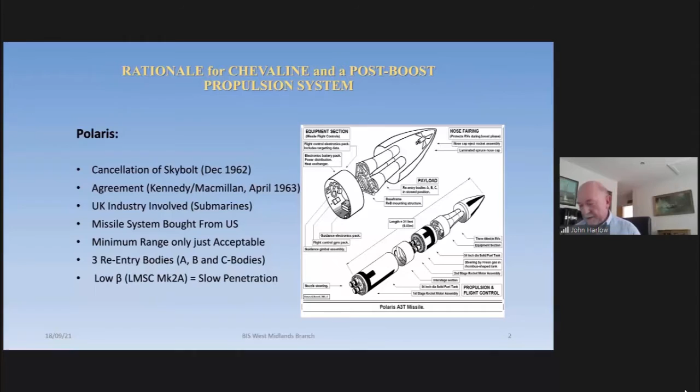Okay, so that's the point there. Terminal velocity is quite low. An easy thing you could do was to have high beta bodies replace the low ones and come in much faster, giving the defence less time to react. A couple of other points: the ABM treaty that I mentioned, the lawmakers really screwed up there. Just to remind everybody, 100 launchers doesn't necessarily mean 100 missiles, but the dear old lawmakers didn't realise that. And studies that we did showed that those launchers could be reloadable. So it wasn't 100 missiles, it could have been 200 or 300 or whatever, protecting Moscow.

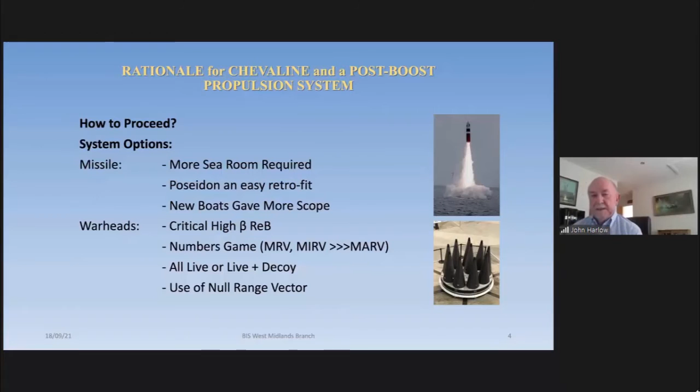The other interesting thing was that SA-12 type, SA-12 plus type systems could be fitted with a nuclear warhead, and the effects of high altitude detonation were unknown against an REB. And when we did get access to that data, it didn't bode well for the survivability of the REBs. Okay, so what were the options? We needed more sea room for the boats, submarines, sorry, nobody calls them boats on Civvy Street, I suppose. We could have had Poseidon missiles backfitted into the Polaris boats, but the whole life was running down anyway on those boats. So obviously, if we had newer boats, we had more scope downstream.

Clearly, high beta, we just mentioned that one. The numbers game of the warheads: it's clear that if we had more warheads to throw at the nasty enemy, he would have to up his game in terms of the defence. There's other things we could do, multiple re-entry vehicles, independent re-entry vehicles, blah, blah, blah, aeroballistic re-entry, etc. But the UK wanted to keep the numbers down for cost. So politically, I guess, economically, we were stuck to low numbers of live warheads.

So the question was, well, if you have a lot of warheads, you either go all live or you have live plus decoy to soak up the defence, and you can use so-called null range vector. Now, the thing about NRV is that it's effectively a volume in space. You can think of it as an arced or curved tube. It all collapses onto the target. So if you fill that tube up with decoys or live warheads, then the enemy sees all this stuff coming in and doesn't know which one's which.

But just to remind everybody, the bottom line, I suppose, is that the missile's job was to lob the C-body at the target and then release the pack. And it was the pack's job to fill up that area of the null range vector with whatever it had on board, all the disguises, and of course the other B-body. And it was the pack's job to move up and down the null range vector, filling that space with whatever the pack wanted to deliver into that space. So we needed propulsion. Next one, please, Bob.

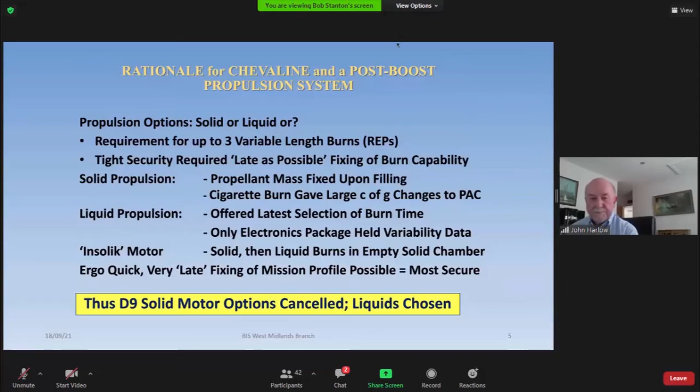Okay. Well, I'm Paul Jackman, an old lag from Westcott. I still live 3 or 4 miles from the site, which is my home village. So I still visit the site quite often, and I'm very interested in some of the sessions you've got, especially with James McFarlane and the Nammo people, having worked closely with them, and in fact starting my career on J-Site, where James now works.

I'm going to do this from memory. I'm not a great collector of history, but I have got a memory, and I'll get my excuses in first. Some of the stuff I'm going to talk about was 50 years ago, so I might make some errors due to a poor memory, and if anyone has anything to correct my memory afterwards, I'll be glad to hear that. That would be great. Next slide, please.

I don't think these slides have been pre-distributed, have they, Bob? So I'll just run quickly through here.

There'll be a brief introduction about myself. Then I'll talk about how these liquid bipropellants came to be at Westcott in the first place, describe them in some detail, then go on to how the technology of that was developed, and leading on to a test vehicle program called PLTV, Packageable Liquid Technology Vehicle, which was very successful and demonstrated a whole range of technologies which eventually got incorporated into the T11.

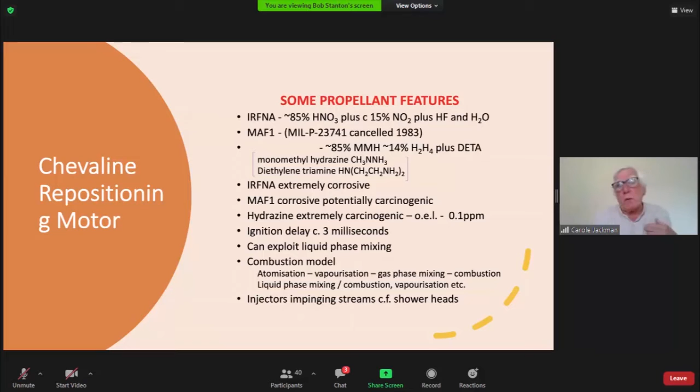Right, so what we set about was, and John wanted me to try and put some names in here, developing these technologies in various sectors and sections. We had actually adopted, though we didn't know it as such, a matrix management approach, something which in my later career as leader of various major programs I was very keen on. So each person had his own line management, but he was also responsible to the group leaders through these activities. So, for example, in propellant handling and safety, it was Dr. Bernard Bonner, a very fine chemist, who still lives in the next village to me.

Expulsion tank design was a guy called Dr. George Cook, an Australian, who I last met at Bernard Bonner's 50th wedding anniversary. We all live close here. Valve technology, Mr. Frank Henderson. Frank developed a lot of the T11. He was responsible for quite a lot of the subsystems. I led the injector thrust chamber design. Solid propellant and isopropyl nitrate gas generator was Dr. Alf Hardacre, and John Rolfe led the solid propellant development for those gas generators.

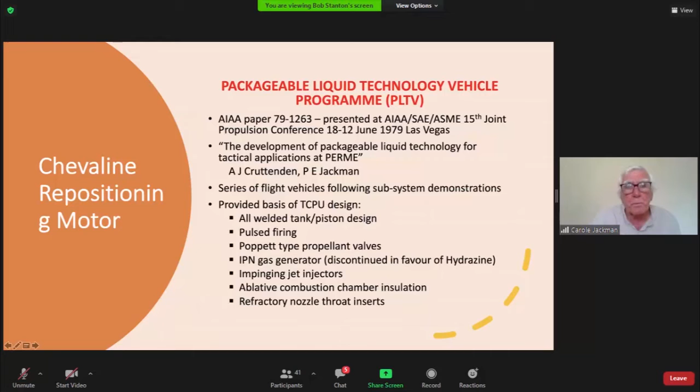Next one, please, Bob.

Right. At this time also, there was a packageable liquid engine being developed for the Lance program in the United States by Ling-Temco-Vought. Lance is a tactical nuclear or conventional warhead vehicle, and it replaced the Honest John. I had the pleasure of going to 2 weeks in practice camp in Lüneburg Heath and actually witnessed an Honest John live firing, which is quite exciting.

But the Lance replaced that, and the engine was developed by Rocketdyne, and it's very complicated. It was a pair of engines that were concentric with each other, and the flight profile was such that the boost engine would fire, and it was spun to maintain accuracy, just like you spin a bullet through a rifle. Spun by, I think it was bleeding gas off the solid propellant gas generator, and it basically put the missile into a predetermined

position, and then from then on, the sustain engine was infinitely variable, and it was flying thrust equals drag. So it's flying a true ballistic or a mocked up ballistic trajectory. So you could very accurately determine where it was going to land. It was an enormously difficult thing to develop, but they did develop it. It used IRFNA and unsymmetrical dimethyl hydrazine, which is similar to MAF1.

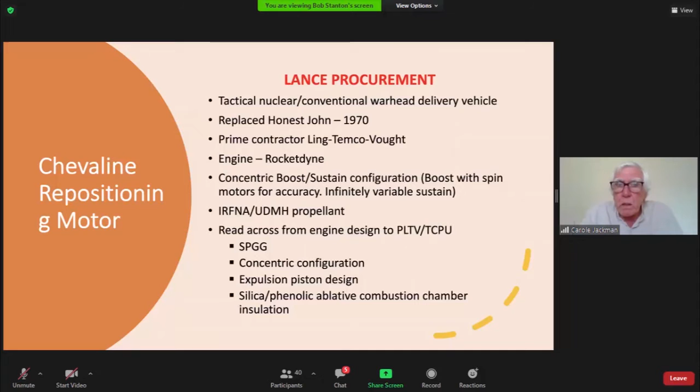So the preparedness we had developed for the T11 development was we had a hypergolic bipropellant technology program well underway, well established through the flight test vehicle. Unbeknowingly, I think, we had developed a management structure for Chevaline. It was a true matrix management structure with the ultimate control, of course, being in Main Building, London. But there was also Farnborough, Aldermaston, and contracting companies involved in all of this, and we had to learn to work with all of those.

And we read across from other USA missile programs and became familiar with USA technology programs. I mentioned earlier Dr. Trevor Horton, and I shall mention him again later. Trevor spent 3 or 4 years in the British Embassy in Washington, and his role there was exactly that, to become familiar with USA technology and to bring that familiarization back to UK and especially Westcott. I applied for that post but never got it, unfortunately.

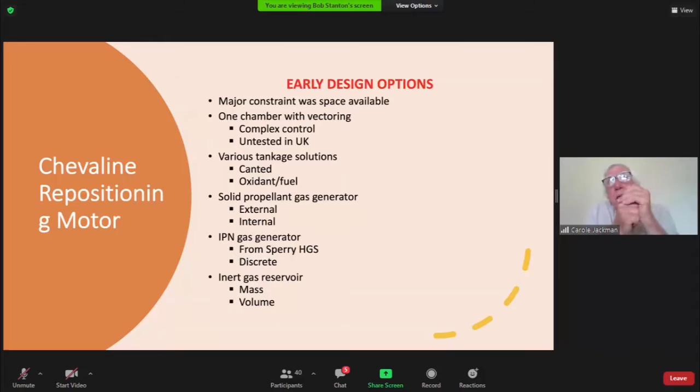Okay, so we've now got the developing technology available to us, but we've got to try and put something together to do what John described earlier. And one of the major constraints was the space available. So John, Bob, if you can flick forward to the next picture, please. This is a penetration aid carrier.

And by the way, the silver tank on the right is a hydrazine tank for the hydrazine actuation system. And immediately to the left, that brown cluster is a rocket engine module. That's 4 hydrazine monoprop thrusters. John, I think I gave you one of those as a memento.

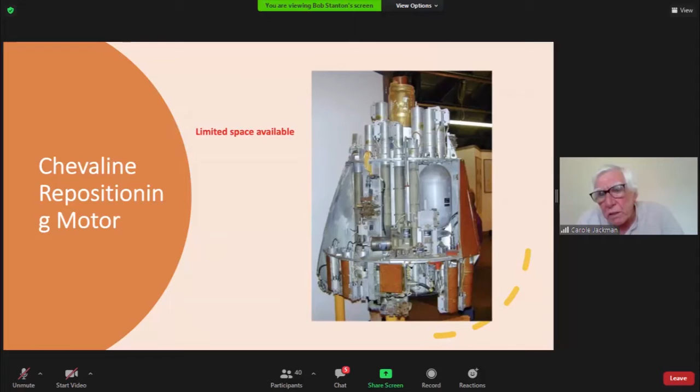That's just a by the by, but you can see how very tightly packaged this is. Those tube-like devices are where, can I say, John, decoys are thrown out of there by very, very complex little rocket motors. They're combined axial and spin thrust, all developed and produced at Westcott. So it's an enormously difficult job to fit all this together. And fit checks was a very important part of developing this thing to make sure it would all go in there. Can we go back now to the previous slide, please?

So we looked at various options. We had to provide elements of thrust or impulse before and after various items have been expelled from the system. And so we had to aim at more than one position on the vehicle. So we looked at vectoring one chamber. Now we've never done thrust vector control of a liquid propellant engine before. We looked at vectoring the whole issue, but it was just too complex. It was untested. Control would have been a nightmare. So that was rapidly thrown out.

Various tankage solutions I can remember were looked at. I can remember examples of canted tanks, fuel and oxidant tanks with different diameters, different shapes, different sizes, all kinds of things. But in the end, again, we found the most volume efficient way was to have parallel sets of tanks.

A solid propellant gas generator, external and internal, was looked at. Sperry gyroscope at Westcott, at A site or the B site. We're trying to develop the HGS system using isopropyl nitrate, and we were looking at trying to pressurize the tanks for the T11 out of that. But in the end, that system became too complicated, too unreliable, probably not likely to work. And so we rapidly went to the United States and procured such a system based upon hydrazine.

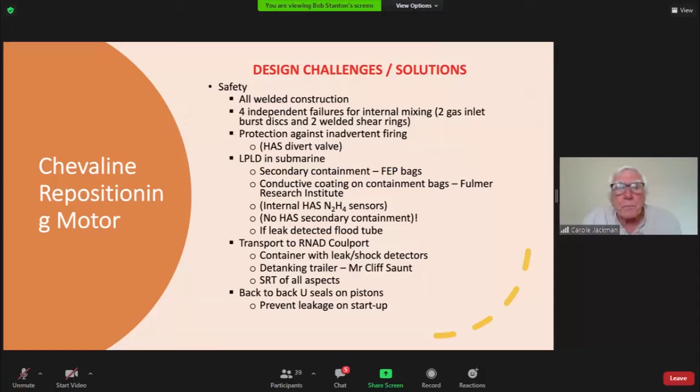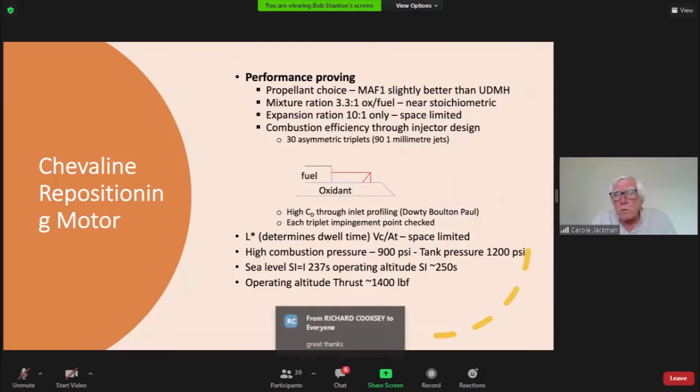Next, please. Right. Okay, I'm realizing I haven't described one thing. I'll describe it as we go through this.

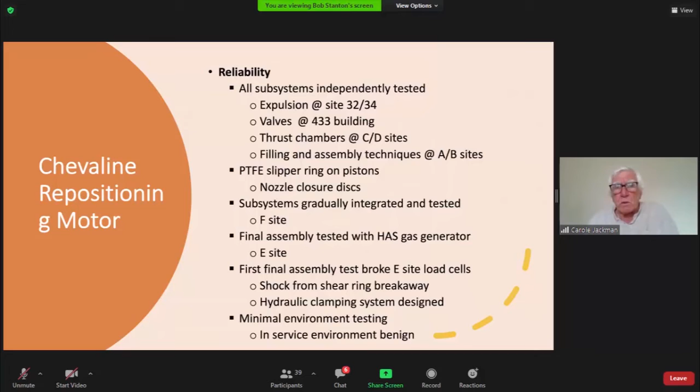Reliability. What we did, all subsystems were independently tested. So the Expulsion Subsystem was developed and tested by Dr. George Cook and his team on one of our runway sites at Westcott, 32 and 34 site. Frank Henderson developed the valves in 433 building and the flow lab at Westcott, which no longer exists. The thrust chambers were developed with help of Fred Nicol, who John mentioned earlier, and Cliff Saunt at C and D sites. And the filling and assembly techniques at A and B site, with people like Jeff Stanley, Chris Saunders.

I'm going to describe the thrust chamber that I mentioned, the ablative thrust chamber liner. What it is, you take a silica mesh, a silica cloth essentially, impregnate it with phenolic resin and cut it at 45 degrees, which is exactly like bias binding that you might use in making clothes. You can then wind that edgewise onto a mandrel. So you've now got a structure of silica phenolic which is edgewise on, so that if it tries to ablate, it's ablating through the lines, not layer by layer. And we got that from the Lance program.

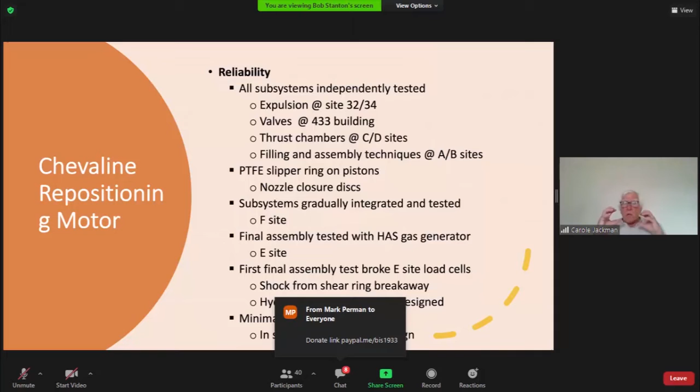And quite interestingly, the first test that we did, it wrecked E-site. And it broke all the load cells because we were having to measure the thrust, and the thrust vector had load cells all over it, and they all broke. And this was simply the shock from that shear ring breaking away and going onto the propellant surface. So after a lot of head scratching, Malcolm Paul essentially designed a hydraulic clamping system. So as this happened, the whole thing was locked very solid. Then we released the hydraulic clamping system and were able to measure the thrust alignment.

There was minimal environmental testing to demonstrate the reliability of this thing. It was never tested at temperature extremes, for example, because as I've just described, it would never see any temperature extremes. A typical military store, you're required to demonstrate that it will work at plus 60, minus 40 centigrade. On this, it was all ambient.

The worst mechanical environment that it was likely to experience, as I said, was on the road between Westcott and Coulport. So luckily, I believe, there was minimal environmental testing, unlike trying to develop a solid propellant rocket motor for a tactical missile system, of which I've got lots of experience, some good and some bad.

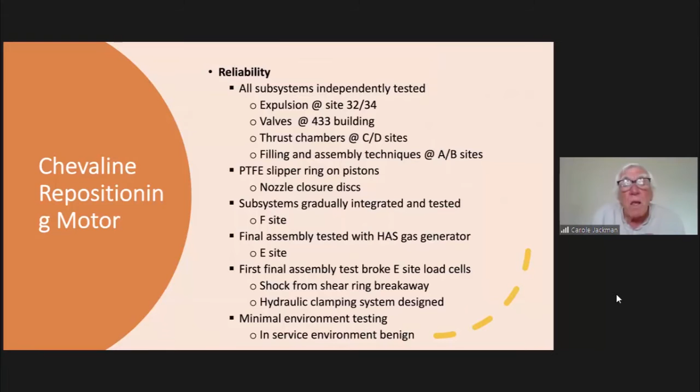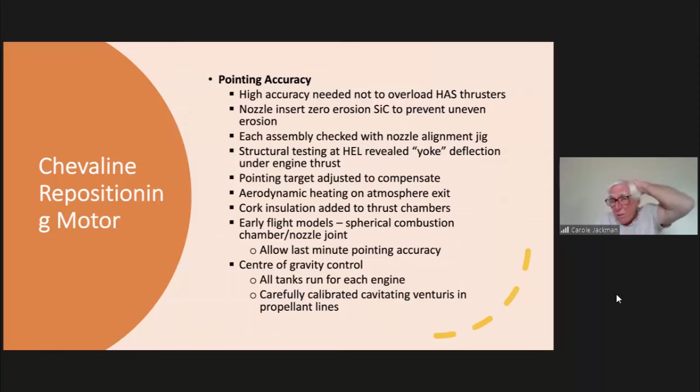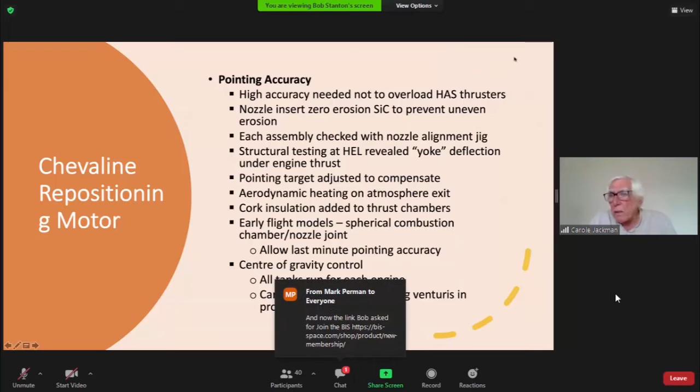Thanks. Right, pointing accuracy was absolutely essential, as it is with any engine that's actually trying to reposition the spacecraft, whether that be an Apogee engine on a modern communications satellite or this thing. If that is not accurately pointed through the centre of gravity, or where it's meant to be, it's essentially the centre of gravity in this case, then the HAS goes into overload trying to correct it. And you rapidly run out of HAS propellant, because it's doing something it's not meant to be doing. It's correcting somebody else's error. So pointing accuracy was absolutely essential on this thing.

And therefore, because the nozzles on the engines are canted, they're aiming at different centres of gravity. They're not axial, they're both canted. Then there's a potential for uneven erosion in the nozzle throat, essentially, which could offset and cause some variation in the pointing of the thrust. So one had to find something that had zero erosion, and the solution to this was a sintered silicon carbide, and that came from British Nuclear Fuels Limited, who used it in their reactors.

It did not erode at all, but after firing, and I always claimed it was after firing, it would always crack. And I invented a term called cracked but intact. So these nozzles at the end of firing were always cracked but intact. But that was essential.

Each assembly, TCPU assembly, had its nozzle alignment checked with a complex jig. Put the thing in the jig, put a yoke-like arrangement, a bit like a big G-clamp, into the nozzle with a pointer, making absolutely sure that it was aiming within, I think, plus or minus 1 millimetre of the centre of gravity position that was predetermined, of course.

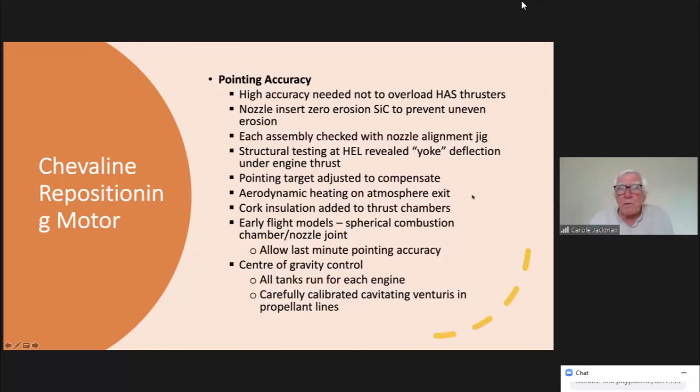Centre of gravity control is, of course, very important. We need to understand where the centre of gravity is and try to maintain it at that one place. So the TCPU had a pair of fuel tanks, a pair of oxidant tanks, and they were all running no matter which engine was running. So that was just achieved by the pipe work. So to try to control the centre of gravity as well as we could, we had that system, and carefully calibrated cavitating venturis, whose operation I've described a little earlier, were in the propellant lines to make sure that the flow through them was dependent only upon the upstream pressure, which was determined by the hydrazine system and its high-level gas generator. So that was a very important part of it, pointing, as it is with modern-day apogee engines. Next, please.

Security clearly was a very major factor. John mentioned it earlier. So when we were transporting this thing about the site, it was always covered up. That might seem far-fetched, but it's well known that satellite photography was such that you could probably see quite a lot of it. The total impulse was very closely guarded. You had to be of a high security clearance before you knew the total impulse available on this thing. And you would never fire the system to depletion, especially through the development missile launches, because anyone watching could easily determine that engine's just run out, therefore there's nothing more to come, because it would die down, rather like a solid propellant would. But if you just turn the thing off, it turns off, and they don't know what else there might be.

And of course, staff were subject to very high security vettings, and need to know was important. You might not know what the guy in the next office was doing. We were told to always assume that there was a spy amongst us. So yeah, that was important. Next, please.

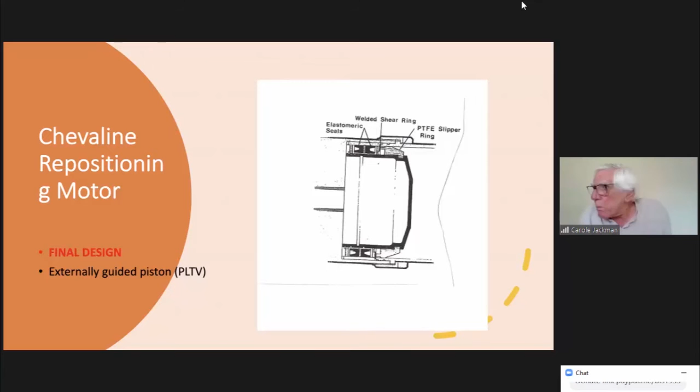Okay, this picture is an extract from the paper I mentioned earlier on the PLTV. So it's actually a PLTV piston assembly, and it shows the PTFE slipper ring I was talking about. It shows the welded shear ring, and it shows the back-to-back elastomeric seals. And as you can see, that's a threaded assembly. It would be all welded on the TCPU. So that was very much the forerunner of the T11. Again, demonstrating that if you've got technology in the bag, you can meet requirements. Next, please.

Here then is the final design. Now, it is sitting on its stillage, which was used to transport it about Westcott. You can see the two gold FEP bags. The FEP bags for the oxidant tanks would be attached to the pack, so that this unit basically sat in them a bit like a pair of trousers. You can see the two thrust chambers with their cork insulation and their conical nozzles pointing in different directions.

The white metallic pipes are the fuel pipes and the oxidant pipes, fuel at the top, oxidant at the bottom, feeding into that central yoke that I described, the beam into which they feed, which carries the poppet valves designed by Frank Henderson that would operate the engines, turn the engines on and off. Sitting below that and just above the aluminium plate is the electric junction box.

The shiny pipe to the left as we look at it, that's the hot gas feed pipe. If you follow it through, you can see it feeds into the tank nearer to you. It goes across the unit and feeds into the tank to the right of you, and it bolted directly on to the HAS high-level gas generator. That's in Nimonic steel, such as you might build a gas turbine blade out of, and that would run cherry red.

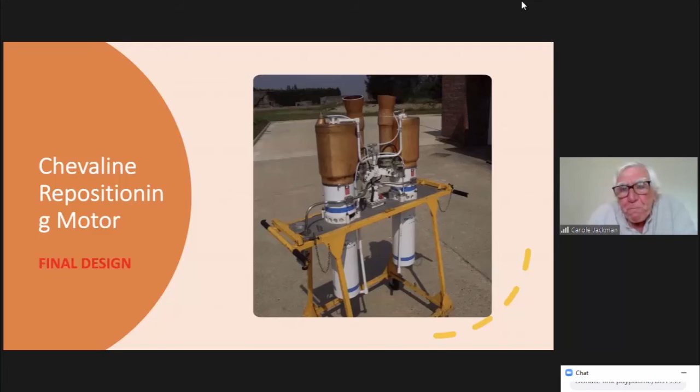And the next slide, please. If you could run a little film now, Bob. This will be a film showing the system being fired horizontally at F site, and then the whole thing being fired at E site, where I described we had to have these hydraulic locks. So we could run that one. So just to check, so that's the package liquid test vehicle? No, the other one, yeah. Okay. Yeah.

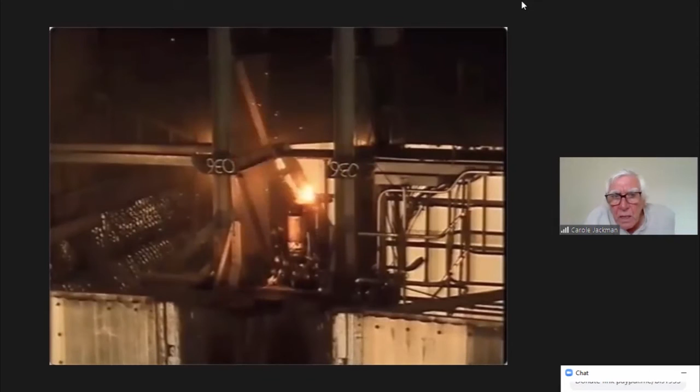You can see what happens there. This is the whole system, and you can also see it's got the gold bags on it. This is all one firing of the system. I think there's probably 3 pulses. This E site, by the way, is absolutely decrepit now. It's a great shame to see it, but it's the site on which the HTP kerosene engines were developed, I think, that went on to power Black Arrow.

John, am I right there? John, do you hear me? Hang on, Paul. Yes, all the Stentors and Blue Steel were fired at E site as well. Yeah. And 605s, BS 605. That's right. And I think it's been preserved as a heritage site now. I think so, yes. But it's absolutely falling to pieces. It's a great shame. And I do emphasise the film's upside down. We fired it downwards at E site. Yeah.

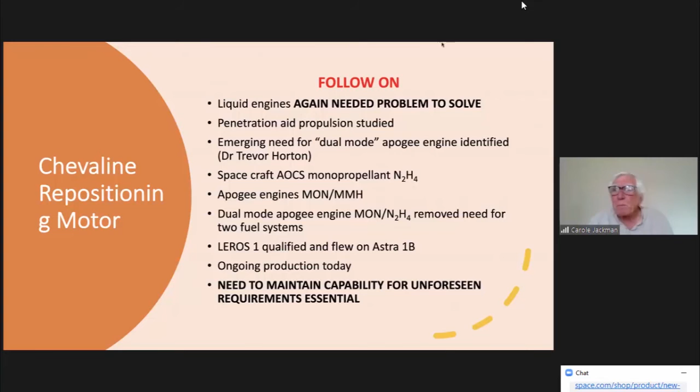And I thought that in the 50th anniversary of Prospero, and the British government just realised that it might be a good idea to have a launch vehicle, I thought I would introduce that theme into this. Thanks very much. I'll take any questions or corrections even.